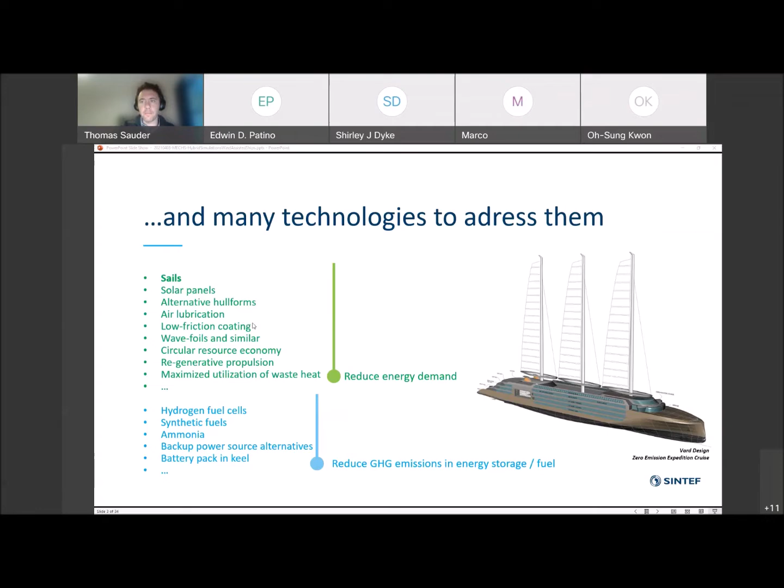So sails, let's say that it's a proven technology up to the 19th century. The ships were powered by sails, and large amounts of cargo were transported by sails. Of course, you don't have the same guarantees as you have today in terms of delivery time and so on, but that's something that exists. In more modern times, you have modern ships that get sail assistance, and here what you have on the screen is the Buckau. That's 1920. That's the first ship that is propelled with a Flettner rotor. I will come back to that because that's the one we used in our study. But that's sail assistance in its first forms.

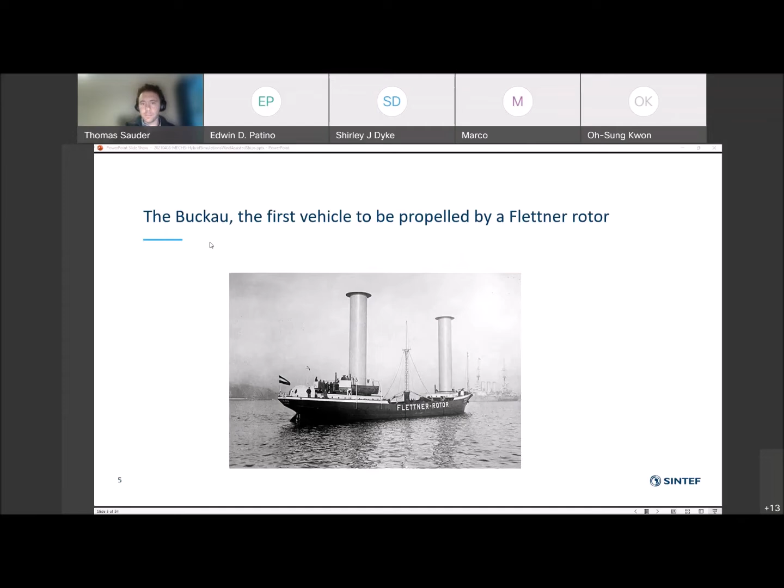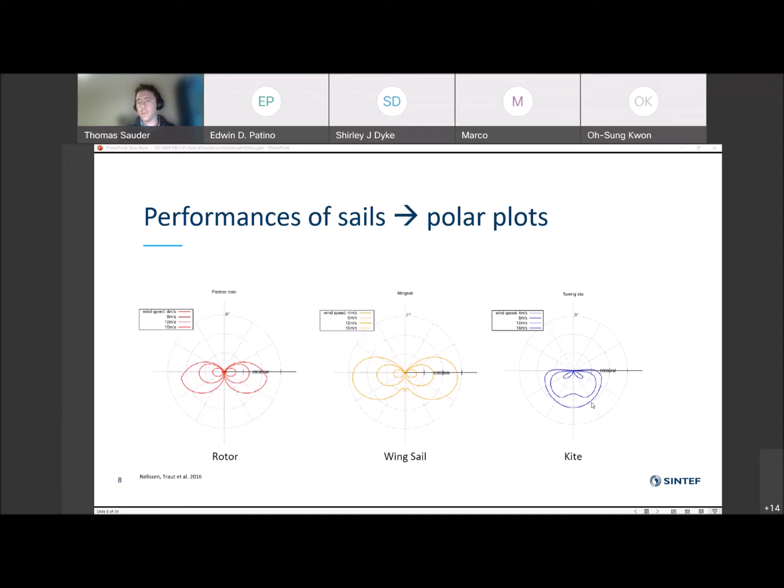But on the other hand, a kite can be very easily stowed on deck of a ship when you have headwind, and in that case, it would not generate any spurious drag. So it's not really yet fully established which concept is the winning concept, and that's why we are looking at this problem.

So what I said before was that we have the performance of a sail that is provided through these polar plots. Things get complicated when we put sails on a ship, because the sail will generate some propulsive force, but it will also generate a huge sideways force. If you've been sailing on a monohull, you know that when you are going upwind, beating, there is a large heel angle that comes from this side force. So the side force on the sails is huge, and that makes the ship drift a bit.

I don't go into the details about all the phenomena that are induced by this drift angle and this side force. But basically, the hull resistance changes, the forces on the appendages change, typically the rudders and the keels, the bilge keels, and so on. The interaction between the rudder and the propeller, which is really optimized for a given type of ship, is changing. The propeller loads are different, so the machinery system will react differently than if you didn't have any sail.

The sail will cause quite a lot of damping in roll and pitch, and that will change something we call the added resistance in waves. It's not expected that you understand all these concepts, but that's an important part. And the bilge keels, which avoid rolling, will generate much more resistance when you have these sails. So it's a lot of phenomena that we need to investigate. And that's why we need experiments to assess the performance of a design, to be sure that we capture all these phenomena.

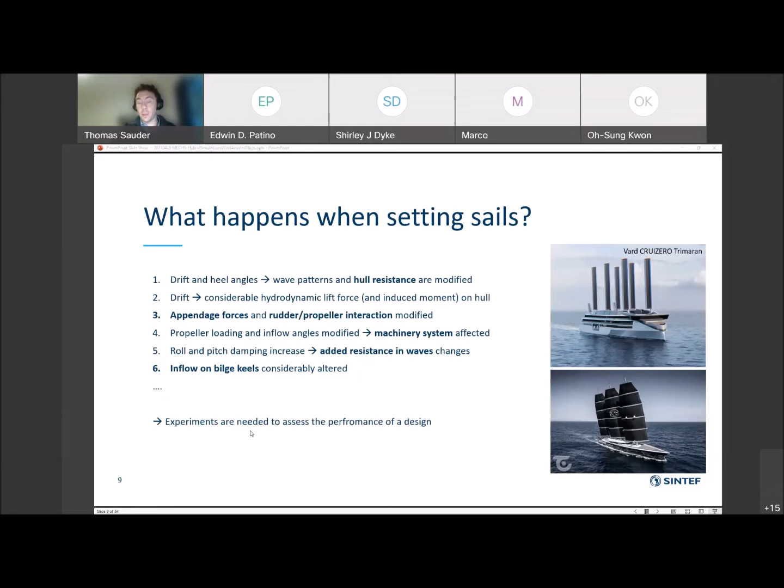Question: can we still perform classical propulsion experiments when we have sails on the deck? The answer is no, and the reason for that is twofold. You have first scale effects. If you are familiar with the floating wind turbine problem, it's basically the same thing. There is a requirement to run the experiments in Froude scaling due to the presence of waves, which are really important for the resistance and the sea-keeping properties. So you have to use Froude scaling.

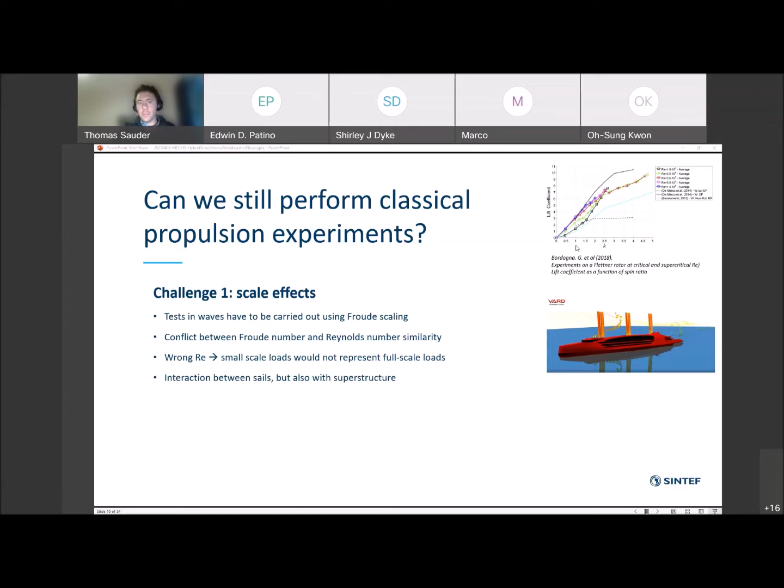But for all the aerodynamic parts, that's Reynolds scaling. And the two are not agreeing if you are not at scale 1. So at model scale, you can't get the two scaling regimes together. And if you don't use the right Reynolds number, which is what we would do in a fully physical experiment, the loads on the sails would not be correct. That's exactly the same issue we faced with floating wind turbines. Interaction is also very difficult to scale correctly, between the sails and also between the sail and the superstructure.

The second challenge is that even if we could model the sails correctly, we would need an incoming wind field that is representative of the full-scale wind field. In our ocean basin, where we test stationary structures, that's already a challenge. But for a ship, we need to be in a towing tank, with a wind field that is following the ship, and that's not feasible at this stage to have a good enough wind field.

So the answer to that is hybrid simulation, or hybrid testing, or cyber-physical testing. Basically it's to mix numerical substructures and physical substructures. How to do that? We say that the hull, the appendages, and the machinery are the physical substructure. Here we use the SINTEF Ocean bulk carrier, an open geometry, SOBC1, which made it possible to publish results, since designers are a bit secretive about their performance. And the numerical substructure would be the sails.

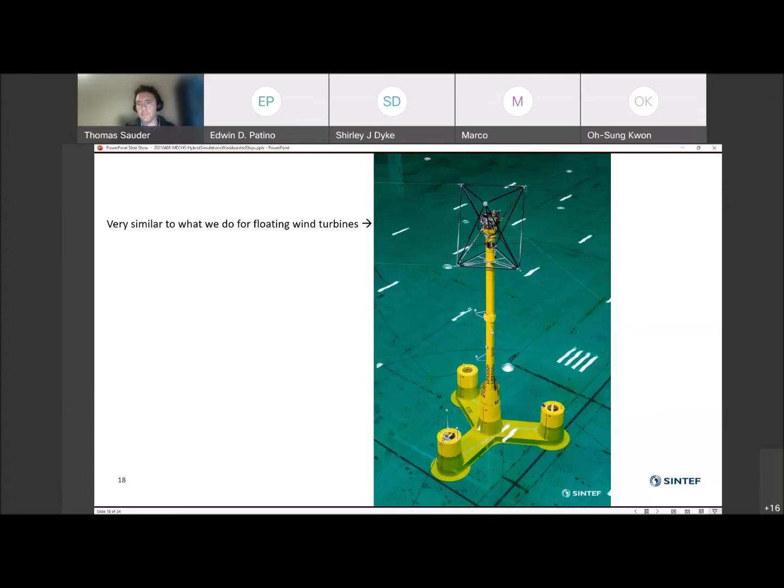And then we go to the numerical substructure. So of course at each time instant, we need to have the drag and lift coefficients to get the drag and lift forces that we integrate all over the sail, and that we sum for the 4 rotors to get the total load that the robot is going to apply on the ship.

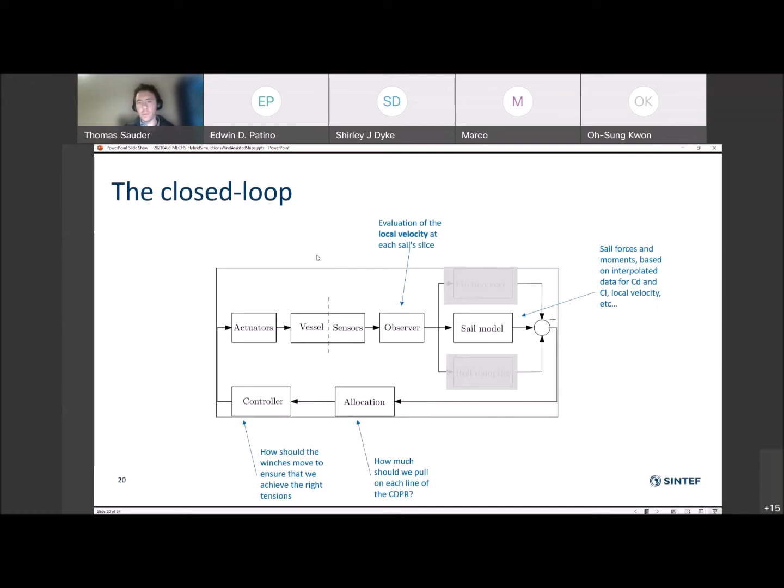Results. Some results. So what I will show you here is quite a simple test. We varied the wind direction from 30 degrees off bow, what we call close hauled in sailing terminology, to 150 degrees, which is broad reach, so the wind comes almost from behind. And we changed that by steps of 15 degrees. In addition to changing the wind direction, we changed the wind velocity, 10, 15, and 20 meters per second, which is approximately twice as much in knots, 20, 30, 40 knots.

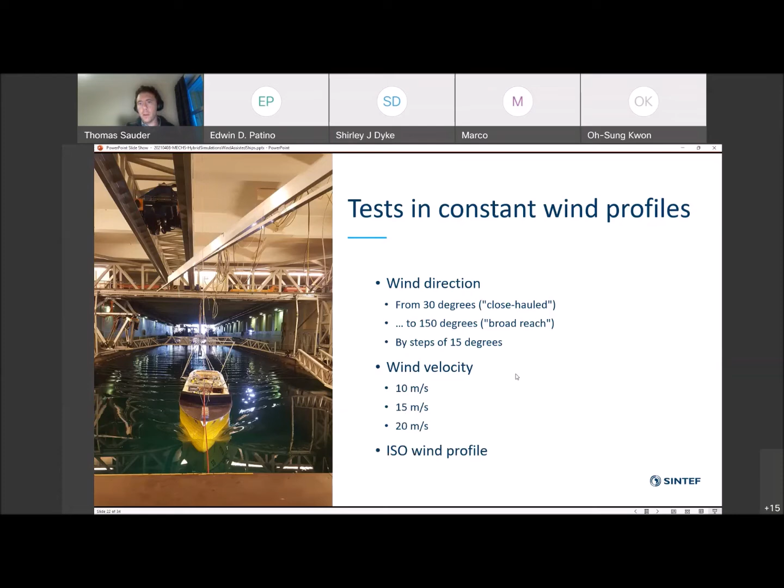The ISO profile was used, so we actually had the real wind profile when we computed; that's why we had slices, to have the wind profile correctly integrated on the sail height. Results are presented in this classical polar plot fashion. So you have the headwind represented by 0 here. That's close hauled, and then wind from the side, broad reach, and wind from behind. So there are different quantities, and for each one you have in black what we had for 10 meters per second, in blue 15 meters per second, and in red 20 meters per second.

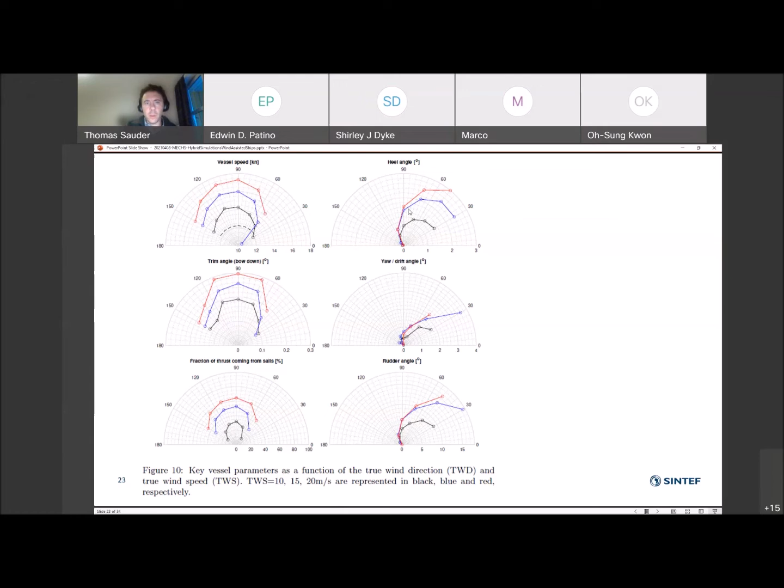So I'll go through that quickly. We have the vessel speed typically. So if we did not have sails, the vessel would go approximately at 12 knots with the power that was provided by the main machinery. When we had sails, we could go up to 17 knots in 20 meters per second, but that was in a really nice angle, so wind coming slightly from the side.

And if we go to angles that are a bit close to the bow, that would cause trouble. You see that the velocity is dropping below the value it had without the sail. So for the rotor sail it's a major drawback. If you can't really fold it on deck, it will brake you when you have headwind.

The heel angle, up to 3 degrees. So with the largest wind velocity, the last run we didn't do, but it would be probably 3-4 degrees of heel, and that's very little. You can probably feel it on deck, but it's not a problem, and that's because the ship is quite massive.

Trim: so the heel was the roll, and the trim is the pitch, and that's negligible, 0.1, 0.2 degrees, unaffected by the wind. Drift angle: the boat would drift sideways with 3.5 degrees. That starts to become a problem when you do long routes. Interestingly, you see the fraction of the thrust that comes from the sails, and you can reach quite good values of up to 60% in these conditions.

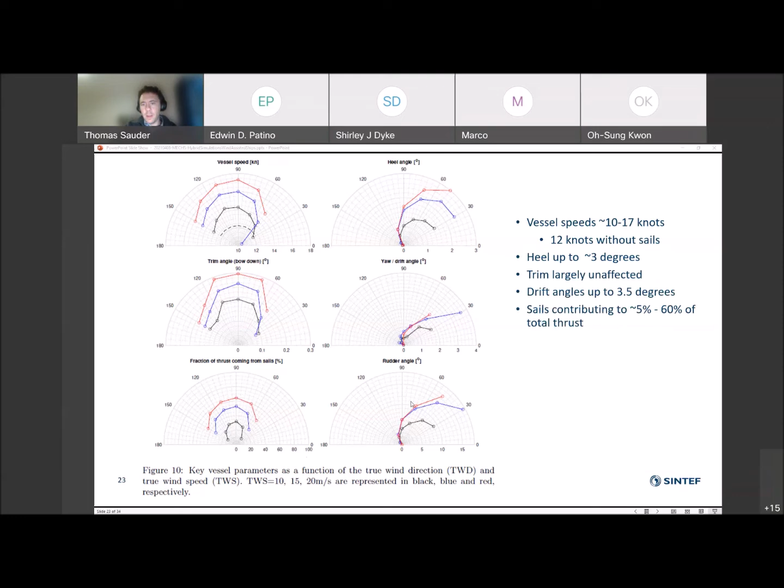More problematic, the rudder angle. That's the last plot. You see that when you have large wind velocities and you are close-hauled, you could actually have up to 20 degrees of rudder angle. So the ship needs to compensate the sideways force from the sail by using the rudder, and that's a lot of forces that will brake the ship. That's not an optimal way of using the rudder.

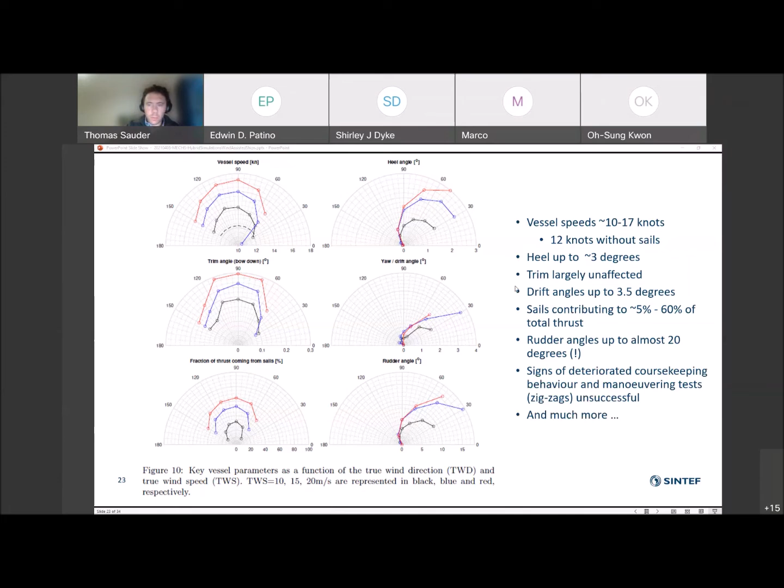And we tried to do some maneuvering tests, typically zigzag tests, and we didn't succeed because the ship was not maneuvering well enough, so we would basically hit the wall of the towing tank. Much more in the paper. I will give you the reference afterwards if you are interested.

Conclusion. For sail-assisted propulsion, hybrid simulation now enables us to obtain quantitative and reliable estimates of the benefits of a wind-assisted propulsion system in calm water. We are still in calm water; we haven't looked at the results in waves. We can very easily change the sail arrangement on deck. That's very handy when it's in the numerical substructure.

And of course, as usual when you do experiments, you discover unexpected effects. Here, that was the loss of maneuvering capabilities, much worse than we would have expected. The reason is that this bulk carrier was designed for not having sails, so it's a retrofit. And the rudder was optimized to reduce resistance, and it was quite small, too small for when you have sails.

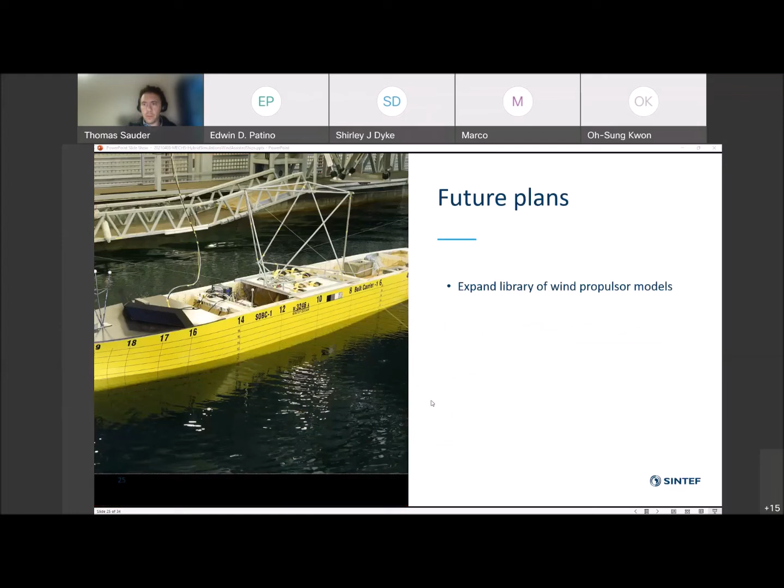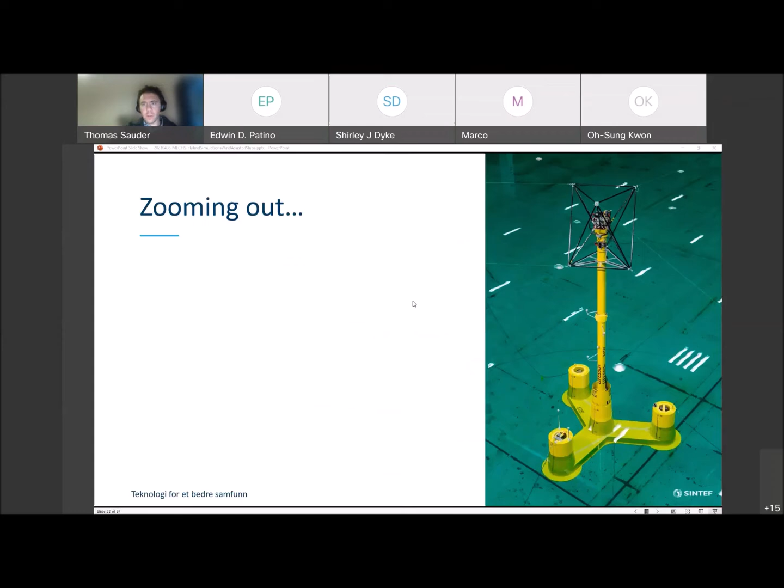I'm already quite late, so the future plans, I will let you read that offline. The details are in a paper that you can read if you like. It's open access. And zooming out, we have sail-assisted propulsion coming as an application that follows floating wind turbines, as you see here, and estimation of nonlinear hydrodynamic loads, something we have worked on recently also. So there are very many applications of these methods in marine hydrodynamics. Very interesting.

And really, hybrid simulation helps us a lot with the infrastructure issues: here, the wind, for example, that we can't model correctly, and the scaling law issues, Reynolds and Froude scaling. We can run the tests automatically, changing the wind test by test, very efficiently. And in projects with other partners in Europe, for example Aarhus University in Denmark, we are working a lot on optimal experimental design using hybrid simulation.

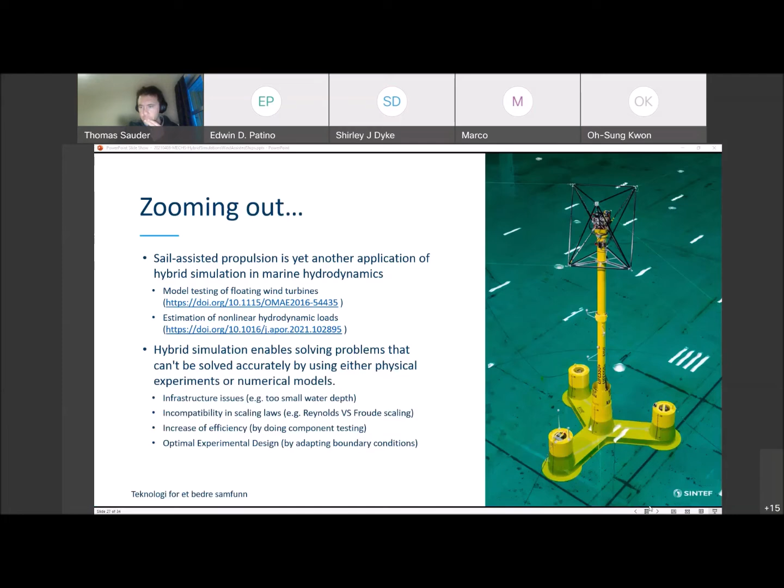Yes, I have a question. Thank you very much, that was a very nice presentation, Thomas. I'm sorry I connected late, so maybe you did mention this. Can you elaborate a little bit more about the type of actuators that you use for this type of tests? Thank you.

Yes, the actuators are exactly the same ones as we use for floating wind turbines. Basically, they are homemade actuators. They are doing force control, but we are using position-controlled motors, very off-the-shelf motors, with a homemade compliance to achieve force control. If you drop me an email, I can send you some references on the details.

Okay, and you connect them to your physical part, and then you identify them just like any other actuator. You get your frequency response and do the tracking, in this case the force tracking controller. That's how you manage the control part. Yes. So the controller, let me know if I go into too great detail, is split into three parts, let's say.

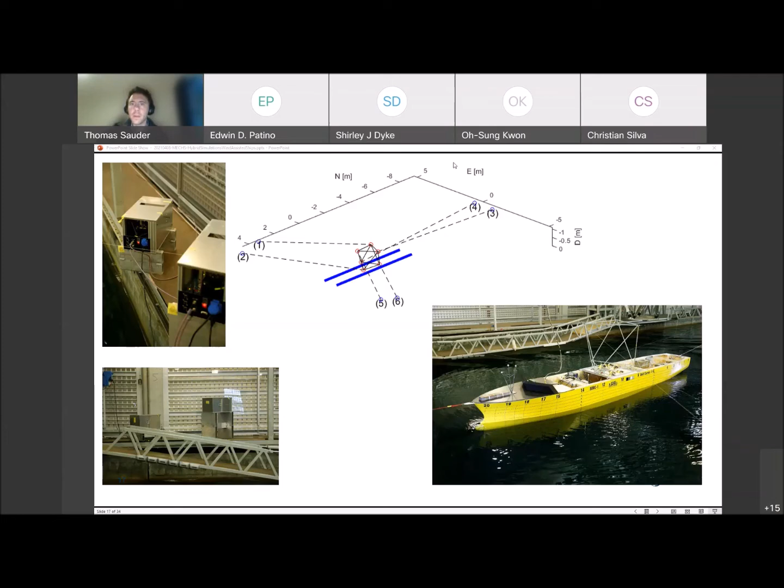about the rotor. So for the ship to propel, the rotor should rotate. And what is the source of energy for the rotation? Do they need to apply any external power, like using any engine in a ship, or does it just rotate using wind power as well?

Yes, so to answer your first question, you're right. You need to have some machinery down there to make that rotate. Of course, the energy that you use to do that is much less than the one that you get from the sails. So that's definitely a good question. So you have a rotating part here.

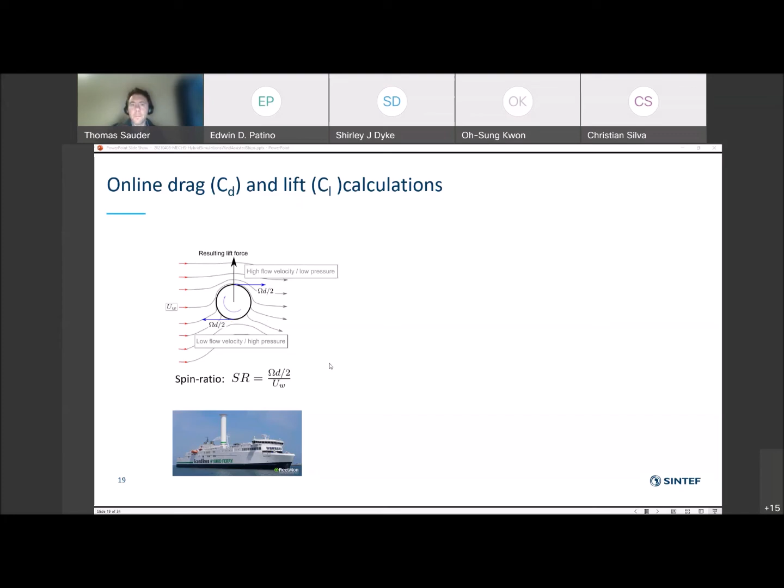Okay. Yes. Then my second question is about the surrogate model representing the relationship between wind and the lift force and drag force, etc. And I assume that the ship will rock back and forth based on the lateral force as well. So the wind speed will change and the wind attack angle will change as the ship moves forward and it shakes back and forth. So is this surrogate model compiled such that it can take into account changes of wind direction while it keeps moving?

Yes. So the surrogate model is just basically this CD and CL, so lift and drag coefficients, as a function of different parameters. And indeed, when the ship accelerates, the apparent wind velocity will change. Okay. Yep. So it means that these coefficients change, and that's integrated into the surrogate model. So everything is updated in real time.

Okay, thank you. That being said, the main limitation of this model is that it doesn't account for any unsteadiness in the flow. So there are steady CFD simulations that we use in an unsteady simulation, which is basically a quasi-static type of approach. It remains to be seen if it's good enough or not. That's definitely still an open question, but that's the best we have as of today. Sure, thank you.

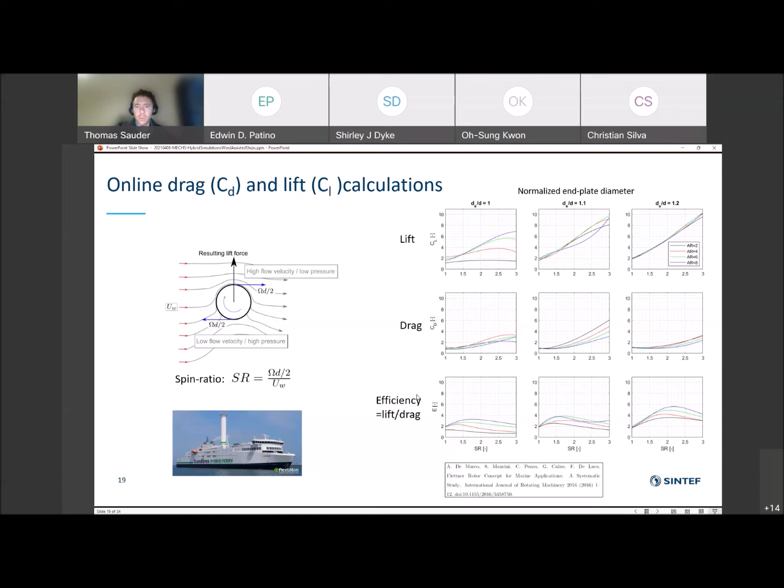But it's basically just a first approximation of the coefficients that you would get by that. Just to be sure that you see. Oh, sorry, that was there.

Yes, so basically we talk about sail-to-sail interaction. One of the rules is to try to put the sails, such rotor sails, so not like the ones presented here, but the one that we discussed earlier, to put them at a distance to each other which is equal to approximately the sail height.

And you will get interaction when you have very sharp angles compared to the wind, so almost wind coming from the bow. But when you get wind from the side, which is where they are the most efficient, then you will limit the interaction between the sails. But again, that's a first approximation.

In our computations, we just used results that were steady, so that's what I answered earlier, but also for sails that were in an infinite fluid. But of course, that's also wrong, because we need to include this interaction with other sails and with the substructure. First approximation, so it's definitely something to improve there.

Okay, was it clear? Thank you. Yes. Yeah, thank you. Is there any other question? If I may, I have one more quick question.